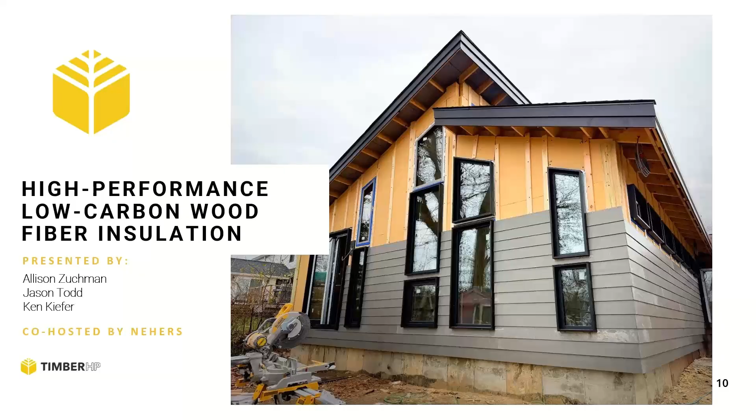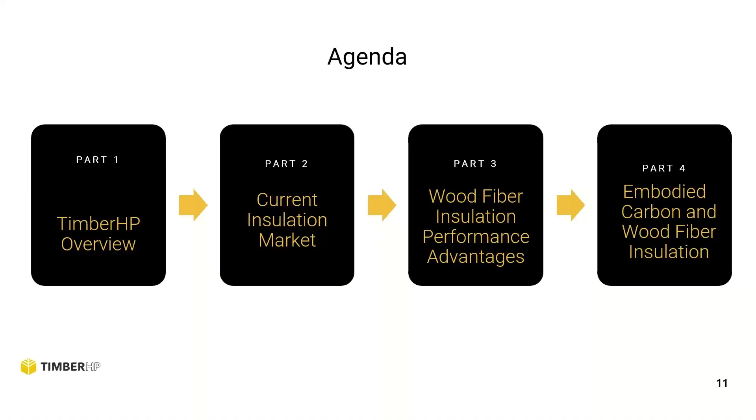All right. We have a lot to cover, and I'm really excited about this presentation. So let's turn it over to our presenters. Please take it away, TimberHP. All right. Thank you so much. So yeah, let's talk a little bit about the wonderful world of wood fiber insulation. If we can go on to slide 11. So we'll start by giving you an overview of what TimberHP is, if you don't already know us. We'll move on and talk about what our current insulation market looks like. Then we'll hit the wood fiber insulation performance advantages, and then move on to embodied carbon and wood fiber insulation, how they pair really well together. Next slide, please. All right, time for some poll questions.

All right, so the first poll question should be appearing on your screen, and I'm going to read this out in case there are folks attending on the phone who can't see the screen. So the first poll question is, who's on the call today? Are you a HERS rater, an architect, a builder, an owner, developer, or a consultant or engineer? So please take a moment and log in your answer, and we can go ahead and close that poll and show the results, please. Great, so HERS rater came in at 25%, architect was 0, builder is 11, owner developer is 13, and consultant engineer is 50%. Allison, do you have any comments on this before we jump into the next poll? No, it's great to see a good mix. I think we're just curious to know who's on the call so we can speak more to each of you. We figured there'd be HERS raters and consultants based on who's involved in this organization, certainly. Yeah, you guessed right. Great.

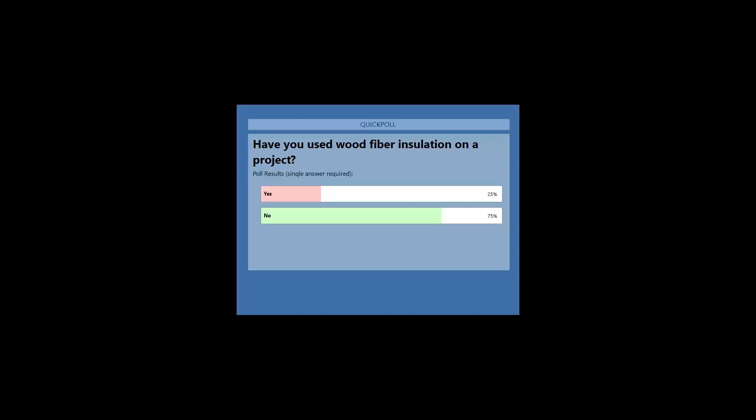All right, let's have the next poll, please. So the second poll is, have you used wood fiber insulation in your project? You have two choices, yes or no. So please take a moment and log in your answer. And we will leave this up here for a minute so you have a second to put it in. I'm very curious to see what the answers will be here. So go ahead and take it down. Great. So the answers were yes, 25%, and no, 75%. Allison, any comments on this one? Well, I think it probably makes sense, since we are the first manufacturer of wood fiber insulation in North America, that only 25% have used the product, because we haven't been around that long. But we're glad to make that number a little higher after today, hopefully. Fantastic. All right, great. Let's see the third poll.

All right. The third poll is, when considering insulation, what is the most important quality to you? Performance, thermal and acoustic, durability, moisture and pest resistance, cost, environmental impact, or ease of installation. So please go ahead and log in your answers for this one. We're going to leave this up also for a few seconds here so folks have a chance to click their answer, even if they're in the middle of working on an email or something. We still want to know what you think.

So, yep, the answers are coming in. This is great. This will be very interesting. So we'll just leave it there for a couple more seconds. Performance, durability, cost, environmental impact, or ease of installation are your choices. All right, let's go ahead and see the answers.

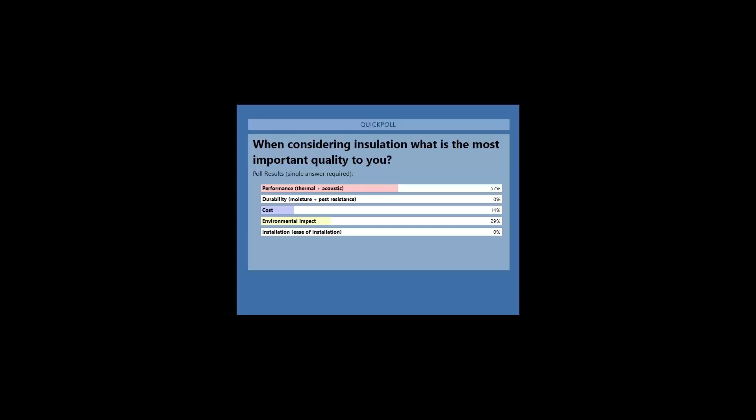All right, so performance came in at 57%. Durability came in at 0. Cost came in at 14. Environmental impact came in at 29. And ease of installation came in at 0. Allison, any comments on this?

Well, we always get a variety of answers to this question. I think performance, environmental impact, and cost are always, in any audience, the top considerations. But we are seeing environmental impact, carbon reduction, also just the fact that we're using reclaimed material from the timber industry in Maine, all of those things. We're glad to see that people value environmental impact, because we feel like we are outstanding in that category compared to other insulation products.

Great. All right, so I'm going to turn this back over to you to jump into the presentation. So please take it away.

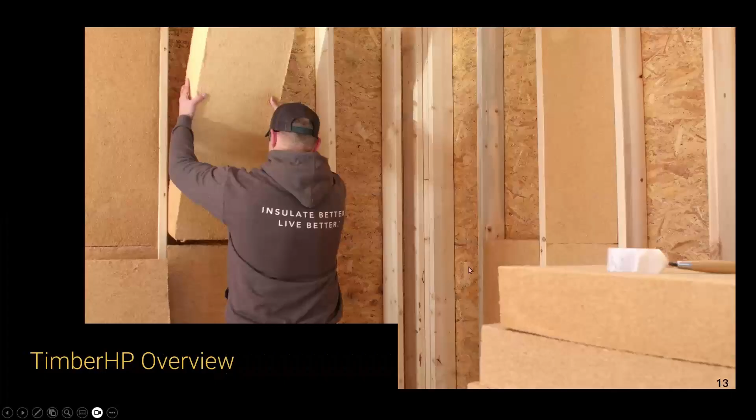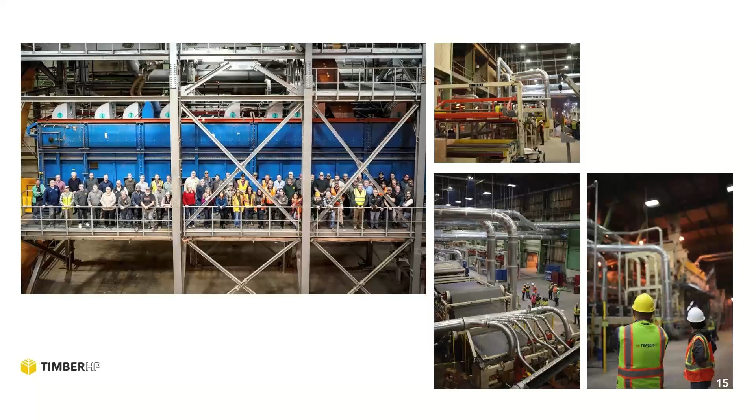And here you can see some shots of our team there on the left. And also, this is where all the magic happens. This is a picture of our batt insulation line, operational, and making some of the best insulation in the United States. On to 16.

And this is important for us because we in Maine have been devastated by the loss of paper mills. There once were 16 to 18 paper mills. We're now down to 2. So we have lost a market for over 4 million tons of low-grade residual wood that the paper mill industry used to use.

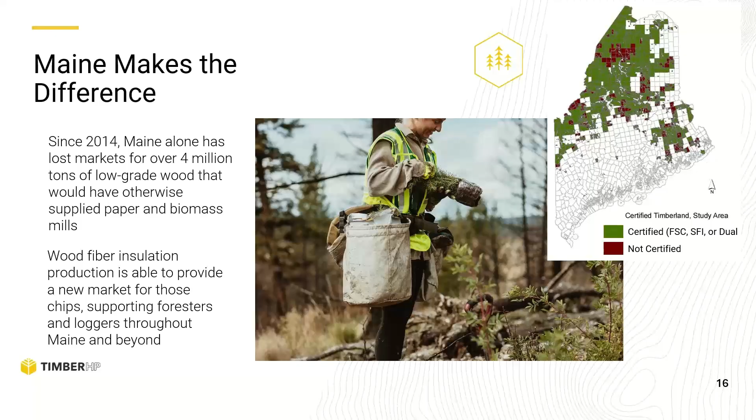We're able to source all of our raw materials from different lumber mills and forestry companies from within 100 miles of our mill. And you can see just how much of northern Maine has certified or not certified timberland, but mostly certified timberland, where we can have access to an almost unlimited supply of raw material. I don't think, even at full capacity, we'll ever touch more than half of what's available in the market. So we've been able to really help revitalize the whole industry, not just putting the few people back to work that work for us. On to the next one.

Now in Europe, this is a very proven and existing technology. They've been using wood fiber insulation for decades there. They have 20 to 25 plants. There's more in development. It's well over a $1 billion market. But in Europe, because of the benefits of wood fiber insulation, they're willing to pay the 20% premium that they experience over other types of insulation.

That's not the same here. We have more trees than people in Maine. They have more people than trees in Europe. So the raw materials are much more expensive in Europe. So we won't see that same cost premium, which puts us at a real competitive advantage. We can move on now.

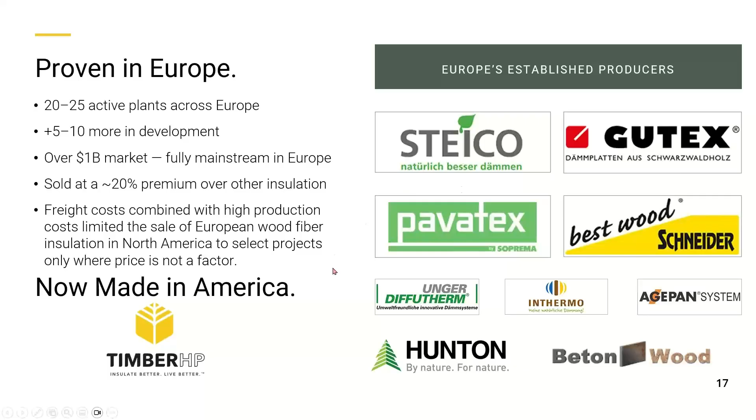So we want to bookend the country. We want to grow and really store the carbon for the trees long term and really help out our country from an embodied carbon standpoint and from an economic standpoint.

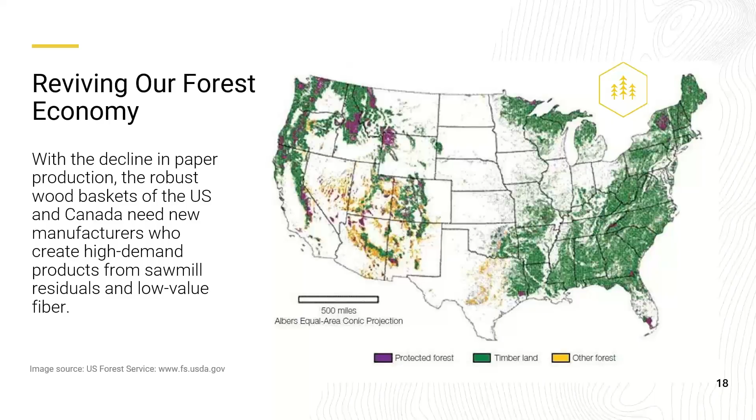Yes, absolutely. And it's important from an economic standpoint, because forestry is an expensive undertaking, and is a dangerous undertaking, and while losing economic drivers to offset some of those costs and danger, the forestry industry at large faces hardship without a market for their residual materials. So it's very important for sure. On to 19.

So this is a very quick and simple diagram of how wood fiber insulation is made. We cut down trees to make square or rectangular boards to build our homes, and we know we need a lot more homes where we have a housing shortage. So we're going to keep harvesting trees in a sustainable way by replanting them, but when we cut a round log into rectilinear shapes, we get waste. We take that waste, those wood chips from the lumber mills, and we run them through our refining process. That refining process, though it looks complex when you see the images of the manufacturing equipment, is relatively simple. We steam the wood, we get it to a certain moisture content, we grind down the wood chips into a very specific fiber size that we need.

We have very highly engineered plates that grind these wood chips into the fibers that we need. Once we get them into the fiber, we can then spray them with a liquid solution of borate salts for our fill and batt product. Those borate salts are a natural fire retardant and pest repellent. They do a really wonderful job at mitigating both of those problems.

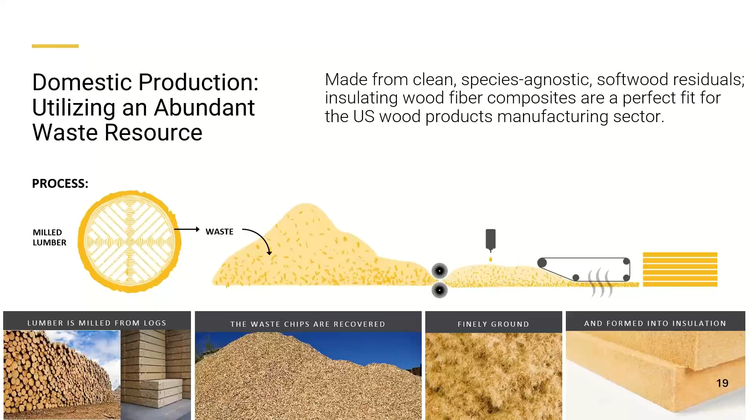There is a ton more science that Jason knows really well about wood species types, fiber size, glue mix, paraffin mix, and all those good things. So if you ever want the in-depth story on how wood fiber insulation is made, please feel free to reach out. We're happy to explore that with you. On to slide 20. And as I mentioned, these are the three products that we make. We have our TimberFill, our TimberBatt, and our TimberBoard. On to 21.

Now, I mentioned earlier that Europeans pay a 20% premium for their wood fiber insulation. Because of the abundant availability of raw materials, we get those raw materials very inexpensively. So that allows us to be very cost competitive. So for any other borate treated cellulose insulation type, we're going to be comparable in cost. For board insulation, we're going to be roughly the same cost as foam. Foam is priced based on the petroleum market, so right now they're facing some price pressures.

Mineral wool, we aim to be around 20% less than mineral wool materials for our wood fiber board. Our batt is going to live right in between your low-grade fiberglasses and your mineral wools. We should be priced probably around the same as high-density fiberglasses, but yes, we're going to live right there in the middle of the insulation cost world for our batt product.

The board pricing is comparable by R-value too. I think it's worth qualifying. The foam board square foot price is what we're competing at, at that equivalent R-value. So we're at 1.5 inches versus 1 inch, and we'll most likely never compete with conventional fiberglass. Certainly a higher density acoustic gets a little bit tighter.

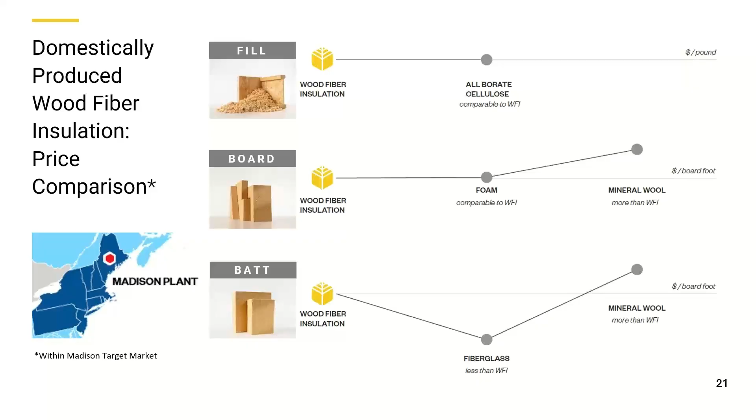But I think what's really important with the batt product and why it is a premium over that commodity product is just how well it can install and getting a grade 1 install simply because of the firmness of the material. Yes, Jason, I like your analogy the last time we discussed. It's a grade 1 install every time. That's right. All right, on to 22.

So this is us. We're a carbon storing insulation product. We're scalable. There are other carbon storing insulation products available, but they're not as easy to scale at mass. Cost effective, we just talked about that. Carbon negative, for sure. We're turning trees into something. We're not letting them rot or burn. High performance. It's a very dense insulation type, so it will help manage airflow through the assembly.

Wood is great at managing moisture. It's what it does to stay alive. So from a cellular structure, it does great at capillary movement of moisture through itself. And then its vapor permeability allows it to dry quickly. Conductivity, we'll talk a little bit about the thermal mass that is uniquely a part of wood fiber insulation. And then sound attenuation, wood fiber insulation, because of its density, is among the best sound attenuation insulation materials available.

This is, again, made from wood residuals. So it's very nice to work with. When you cut it, you don't get little foam dust that static clings to everything and blows all over the place. You get sawdust. It's non-toxic and safe. It leads to a really, really high indoor air quality. We don't see any off-gassing of harmful chemicals like you would with other insulation types.

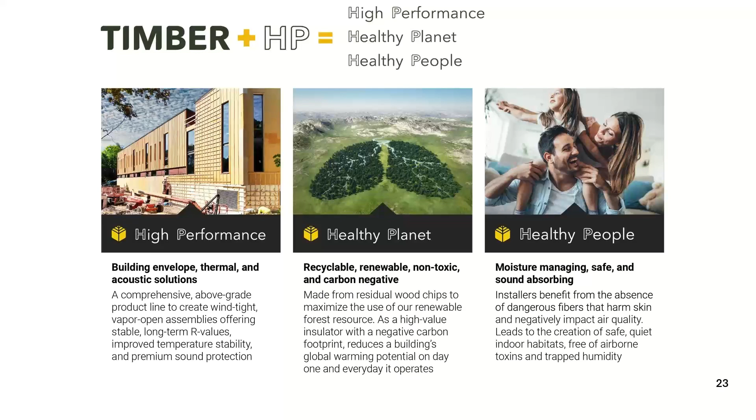Absolutely, absolutely. And to slide 24. So here's what our current insulation market is going to look like. Next slide. We know that every year or every 3 years through the code cycle we're requiring more insulation to the exterior of the building. We're requiring higher air tightness, all driven toward making buildings more efficient and more durable and resilient.

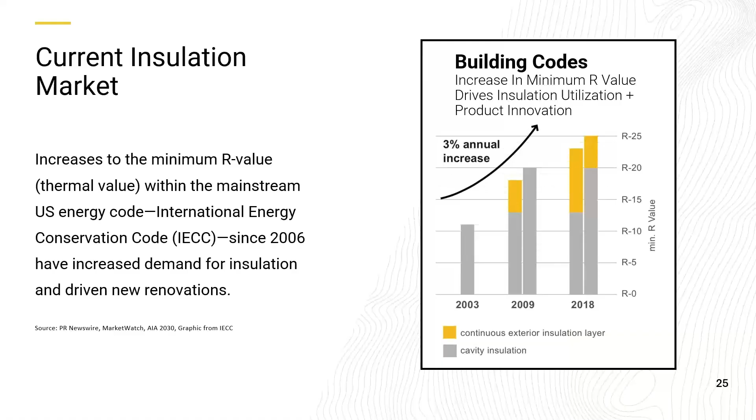Next slide, please. And to do that, historically, fiberglass has been the answer. It's very inexpensive. It still occupies the largest share of the insulation market at over 55%. And of course, as R-values have been driven up by code, a lot of people have turned to foam plastics as an easy way to try and get there. As Jason said, they have places in insulating, but they do have their own drawbacks.

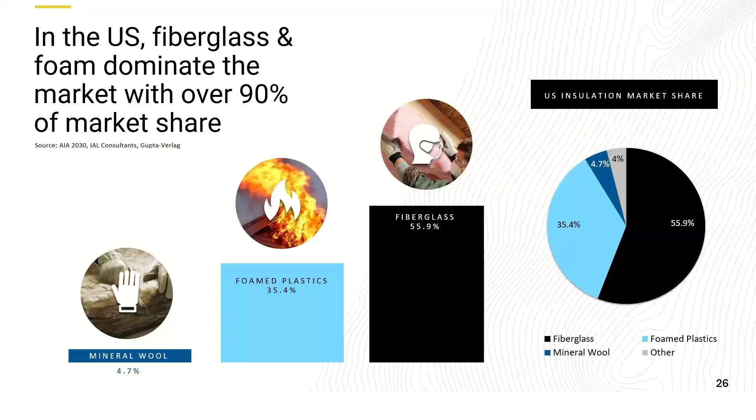Mineral wool nationally is around 4%. I think in the Northeast we'll see that higher, closer to 10 to 12%, as an alternative to your fiberglass and foam plastics. The rest of the 4%, that's where we fit in with denim products, sheep's wool, all the other bio-based products, cellulose, and things like that. So we can see that we have plenty of room to make hay in the insulation market. Next slide.

So as codes have increased in stringency, and building science has provided a lot more data on how we should be building buildings, we can see that we haven't had much change in the insulation industry. Fiberglass has been around since 1938. Most of them are formaldehyde free now, but they're not very dense. They face easy compressibility for reduced R value. It's easy to not get tight installs and can allow for wind washing in the cavity.

We got foam plastics in the 1950s. Foam plastics are definitely flammable and can often have toxic off-gassing. I have a friend who's a firefighter in Massachusetts, and this is something they're concerned with when they enter a burning building. Those foam drips can actually burn through different parts of their fire protection equipment. So that is concerning for them, not only for that, but for the toxicity of the smoke as it's burning. Mineral wool came around in 1953.

Obviously, you can't burn a rock, so it is extremely flame retardant. But it's also very itchy. It can be a very big irritant on your skin, and also in your lungs and in your eyes. And then we have cellulose in the 50s as well. Cellulose is definitely falling victim to a shrinking feedstock, as we don't use newspapers so much anymore. We're getting all our information digitally. So we see that the feedstock is shrinking. The powdered flame retardant, as I said earlier, likes to blow off as you're blowing the insulation in, and it's a very messy, dusty install.

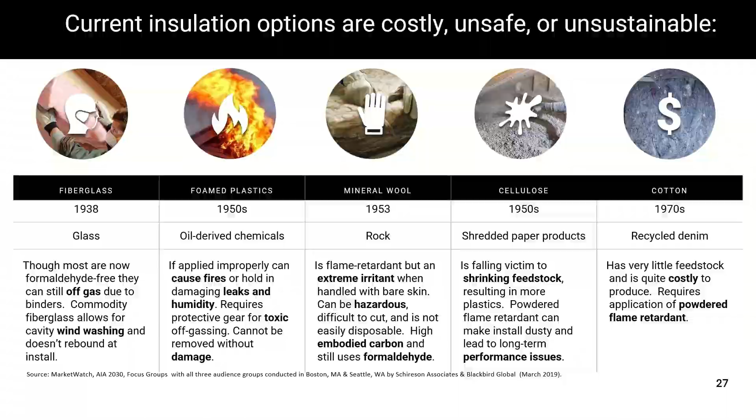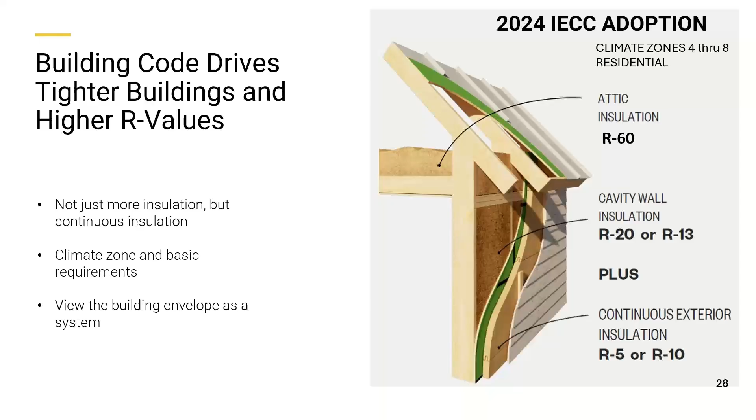So as we mentioned earlier, our above grade system allows us to hit all of the energy codes that are already here and that are coming down the pipe. Next slide, please. And one of the best ways we can do this is through the reduction of thermal bridging with the use of the continuous insulation. This is why this has been getting added to the codes, as you all know. This is the best way to maintain your wall's effective R value.

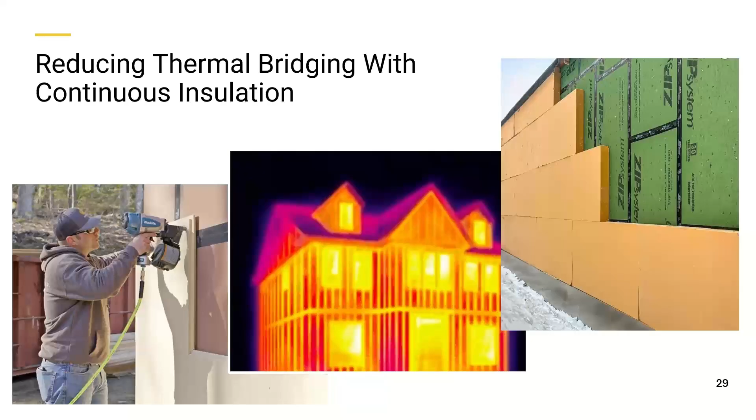I see it all the time. I live in New Hampshire. New Hampshire seems to be the black hole for building performance. So I can go down my street any given day on a frosty or dewy morning and see where every home's studs are, just based on the melt pattern of that frost. Next slide.

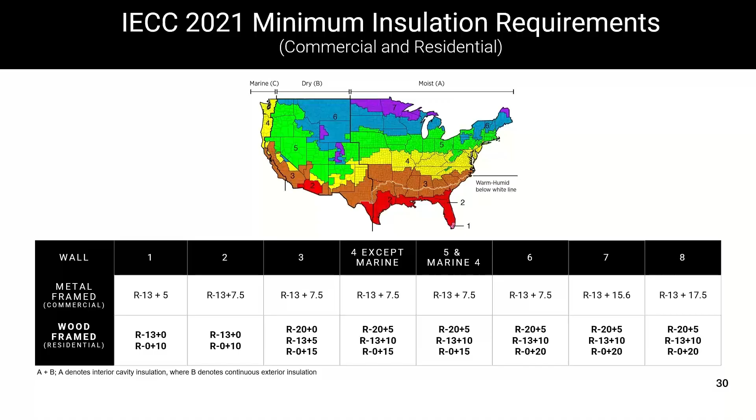So this is just a quick slide based on our climate zones and what is required for wood and metal framed commercial and residential construction types for interior and exterior insulation. Next slide. So for us, we look at ourselves as a relatively drop-in replacement for most above grade materials. So we're going to see the easiest replacement, especially in the batt, because this is going to install exactly the way your mineral wool batts are going to install. You're going to get a grade 1 installation every time. You're not going to be able to just grab handfuls of it like you will with fiberglass, for sure.

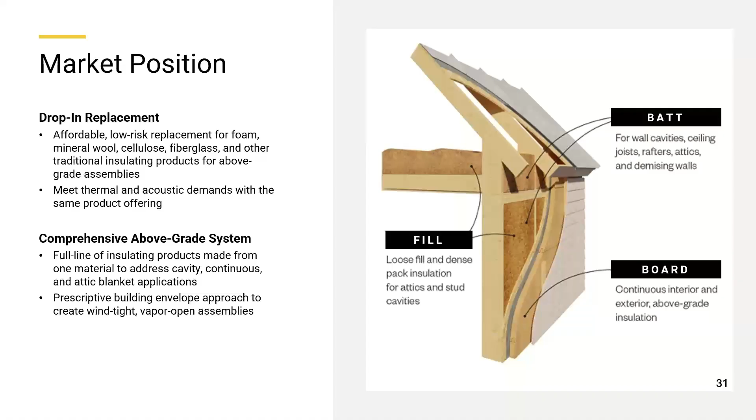But the installation quality will be much higher. Attic blankets are going to install relatively the same as your cellulose. The machine just needs to be adjusted properly, and we do have guidance on how to adjust the machine properly to blow a denser fiber. And then our board insulation, any contractor who's ever cut a piece of sheathing should be able to use our board insulation very easily. Cuts just like wood with all the same tools that they have, and it compresses very, very little. So the final cladding is going to have a higher quality install because of that. Next slide, please.

So for our exterior board insulation, right now with our Class B rating, we're going to be able to be used in single and multifamily construction types, type 5B most specifically. So buildings 4 stories or less, some mass timber, CLT, and then of course this is a great addition to factory-built solutions for either panel or modular buildings, and of course passive house and net zero carbon negative buildings were the perfect fit for all of those as well.

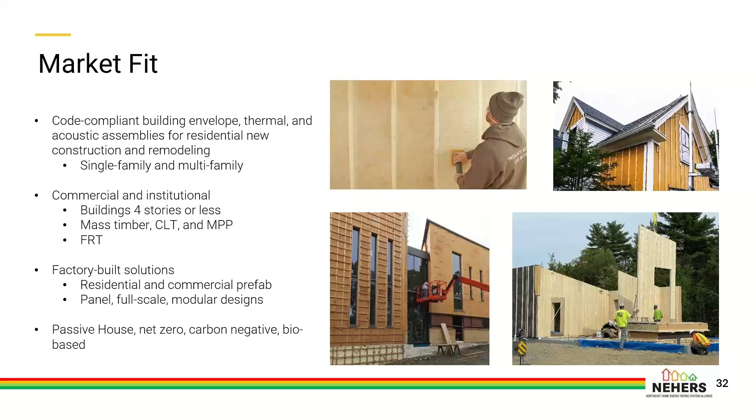Yeah, you're seeing some outside of the traditional residential type 5 construction, but for the cavity insulations in particular, it's something that's available for any construction type. We've got hourly rated walls and acoustic STC ratings on walls as well for those cavity insulations. So it's something to consider when projects go beyond the residential scope. Absolutely. All right, now we can go to number 33.

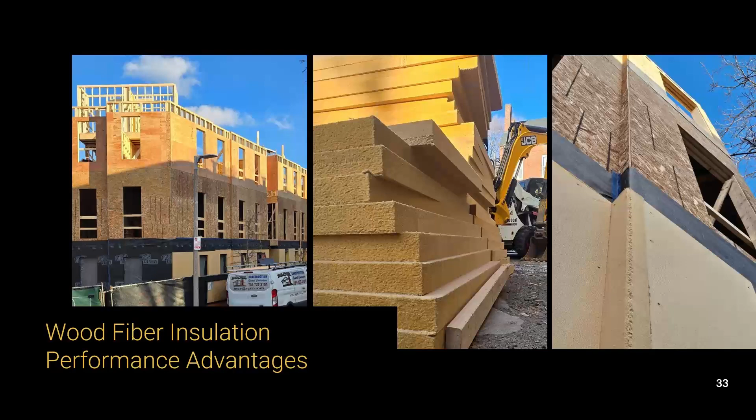So wood fiber insulation performance advantages. This is actually for any of you who are near South Boston. This is in Roxbury at 27 Kenilworth Street, if you want to go see it. Next slide, please. So our loose fill and dense pack insulation is going to get an average of R 3.8 per inch. Jason, that's a little bit lower for the loose fill, correct?

3.7 maybe? Yeah, when we get dense packed, we'll hit that 3.8 per inch, but it does drop depending on, like, if it's in an attic. There's sort of a progressive density, so it's all in a number of inches to hit an R value. So 3.4, 3.5, 3.6, depending on how compressed it gets. It gets better to a point. We get up towards the batt density.

That's sort of where we tap out or maximize our R value per inch. Perfect. And as Jason said, this is treated with our borate salt. So this is Class A and can be used in nearly any construction type.

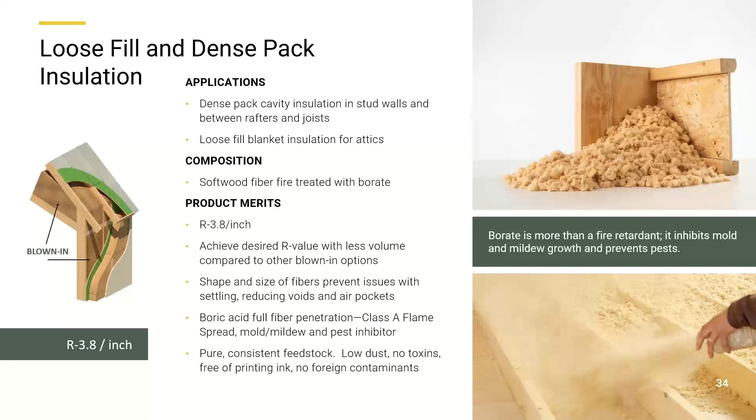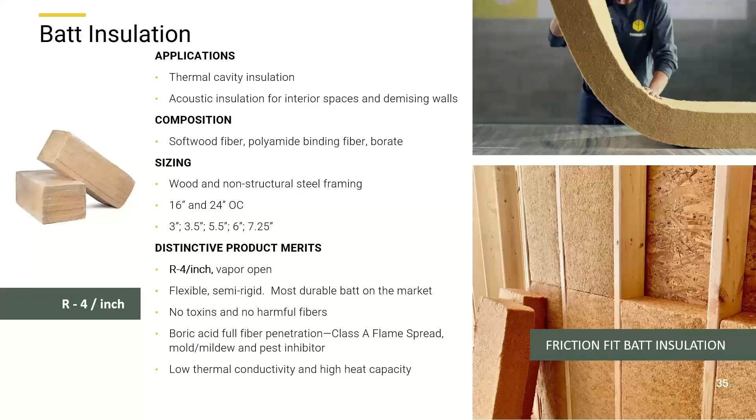Yeah, that's a big and important point. It's a twofold process for that flame resistance. If we look to what happened at the Cathedral of Notre Dame, the biggest reason that there wasn't more catastrophic damage than there was is because the char protected the wood.

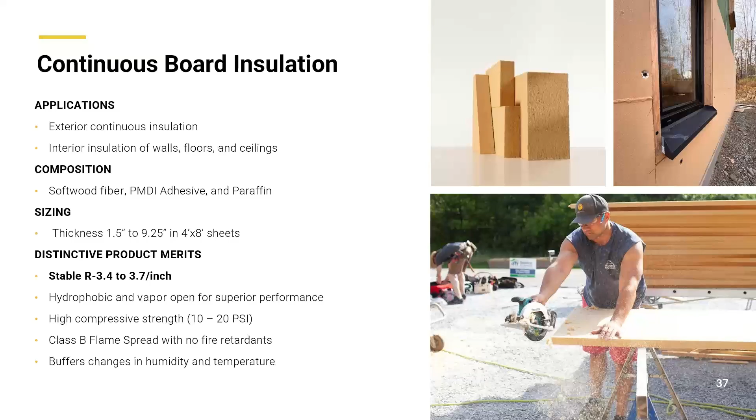but we can run this all day long and it's never going to make its way through the bulk of the board. It's hydrophobic, particularly at the surface, but it's also a bit of a complex puzzle because we're treating it at the fiber level. It remains vapor open and it allows moisture to move around as needed. It acts as a big buffer to the structural sheathing and the structure itself, which is the critical part that needs to stay dry and be allowed to dry in the end.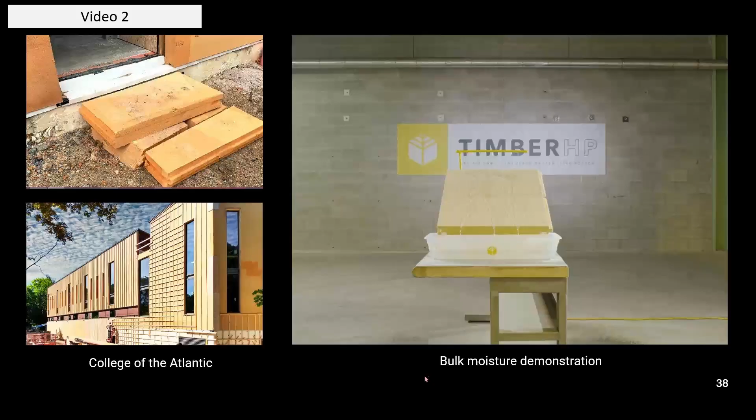Beautiful. All right, on to the next one. And here is a video demonstration of our non-borate treated wood fiber continuous insulation compared to our foam counterparts. Just keep in mind during the video that it is a non-treated board, so there's no...

Yeah, I find this really compelling in the speed at which EPS, which is not going to be as common on sidewalls necessarily, but it's still a liability. And you're seeing even with an XPS foam, even some that are treated, at least at the surface level, to be Class A, to be part of those taller assemblies, it melts in the end. And there's quite a bit of smoke that comes off of this.

The important thing with fire resistance in building materials is allowing people to have the time to get out of the building, not being consumed by the other toxins that might come off of that. And again, like Ken had suggested, Class B board, limited flame spread, limited smoke. The brave Edith grabbing the panel while it's still on fire there. But really surface charring, protection, added time without added chemicals, just the density of the board and that charring.

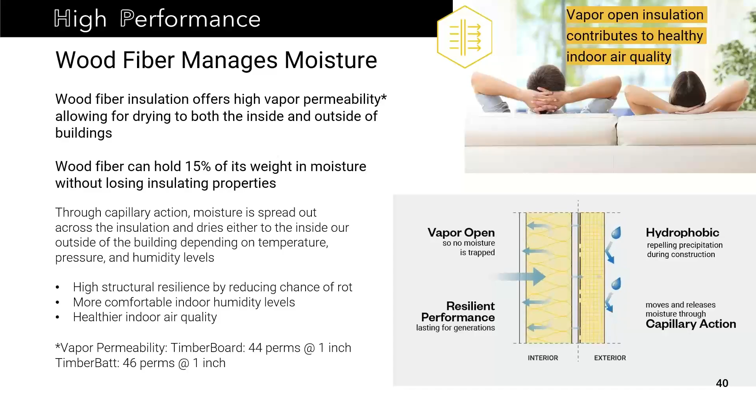Yeah, I mean, the big important thing here to understand is that the wood can get wet. It's not the wetting process that harms the wood, it's the staying wet. So the ability for our products to dry and dry rapidly really increases the resiliency and durability. Next slide, please.

Yeah, it's absolutely true. There's a balance of density and heat capacity and also conductivity. And when we do steady state, hot plate, cold plate, what's the R value in that? Every material has to reach that steady state to do R value testing. Foams tend to be light density and tend to pass that heat through pretty quickly, even if they are higher R value. We recently got the pleasure of sending some 9.25 inch board down to a lab for third-party testing, and we got to be the talk of the lab because it took 8 days to reach steady state.

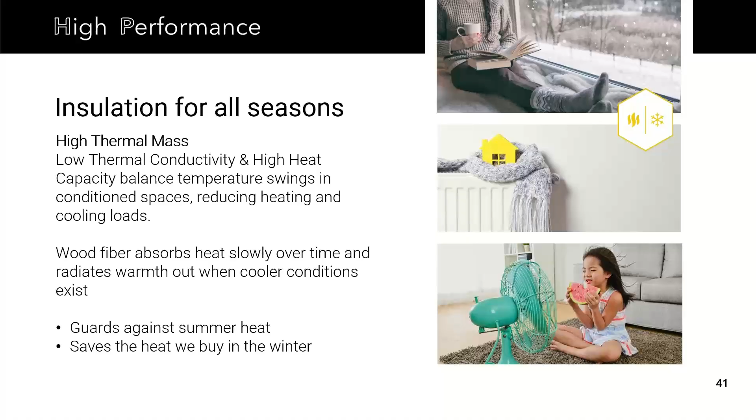But yes, we are very vapor open. We're not going to trap humidity within the home that will lead to mold and mildew and all the respiratory problems that we're seeing become so prevalent lately. And acoustics, the acoustics are amazing with wood fiber insulation.

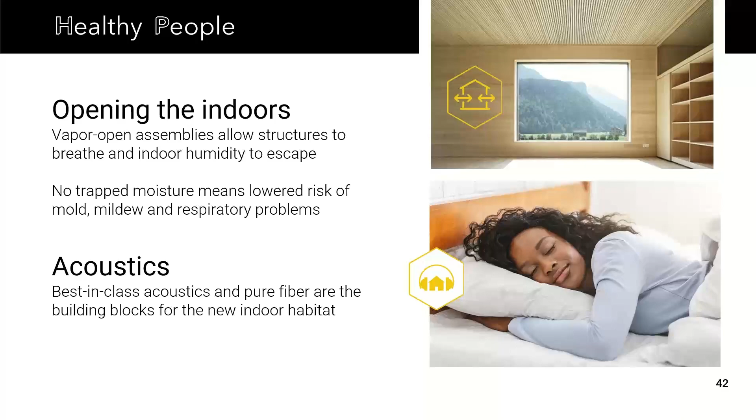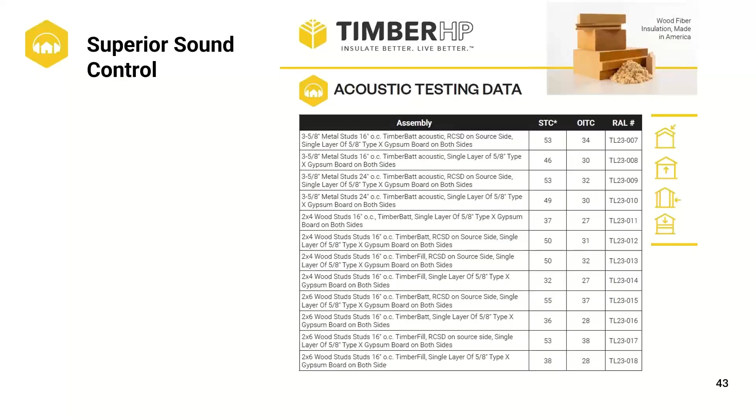Next slide, please. And this is an example of some of the acoustic testing data that you'll be able to find on our website. And you can see that in many cases, with very simple assemblies, we can reach the STC rating required for demising walls in multifamily buildings.

Next slide, please. Here is one example of how we can perform better than mineral wool in this very specific assembly. So this is just 2x6 studs, 16 on center, cavity filled with TimberBatt, resilient channel on just the source side, and one single layer of 5/8 Type X gypsum on both sides. So we can see that we don't have to add double layers of gypsum. We don't have to add 2 resilient channels. It's a very simple wall assembly, and we're going to outperform others in the same scenario.

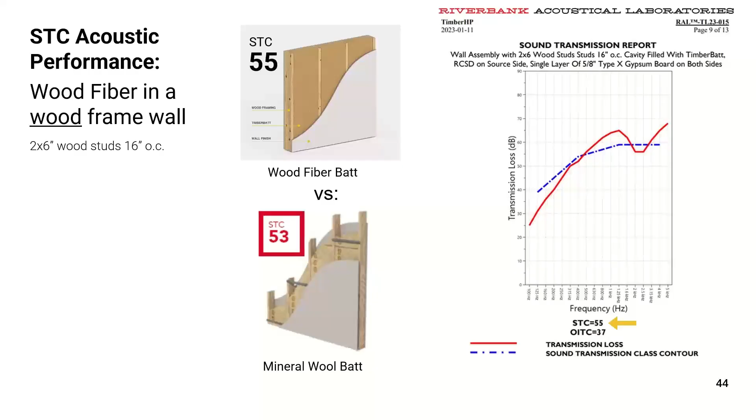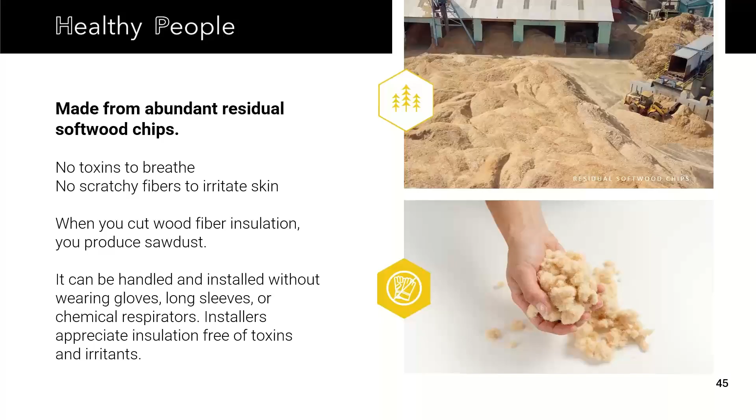Next slide, please. And healthy people, I know we've talked about this a few times, but it's wood. It's wood, it's all natural products. It is a pleasure to work with. If you've ever had a chance to get your hands on it, you can touch it with your bare hands and not be itching for days afterwards. There's no concern for any of the skin irritation unless you're allergic to trees, the wood pulp from the trees. Very few people are, but this is a really, really great insulation choice for everyone, especially those with respiratory problems.

You'll know more about that than I will. Yeah, it gets a little complicated, but in the non-combustible types, there's a place for us for thermal, fire resistive assemblies. If they're hourly rated, we have those, and certainly for acoustic applications. It gets more complex when you start talking about outside of the walls, and certainly with our board product, we're focused on type 5 construction. Just about all of that available with TimberBoard currently. Perfect.

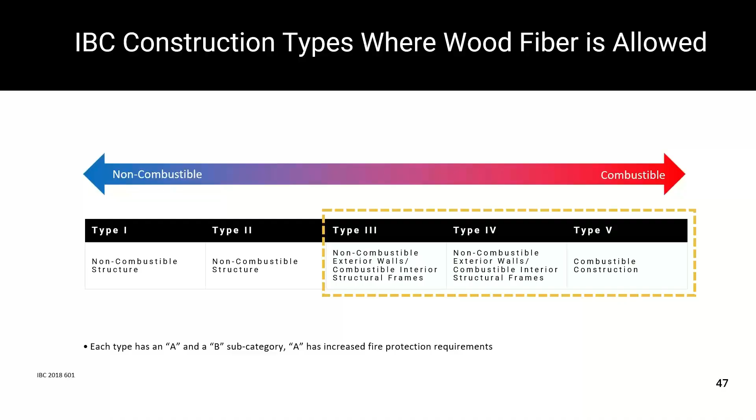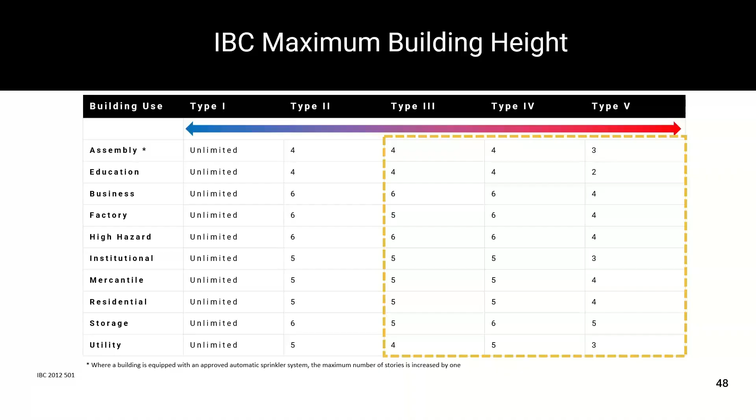Next slide. And there you see just a highlight of where we stand. And the next slide will show you a little bit more in depth of what our limitations are on building height. Next slide, please. And so there you see kind of where we know we can play for sure without much complexity with the interior products. Again, the exterior product, we want to stay in that type 5 zone. Next slide.

Now, low embodied carbon. This is one of wood fiber's most impressive features, is just how much carbon storing can happen within this type of insulation. Next slide, please. So we know that the CO2 emissions by sector is largely consumed by buildings. 30.8 or 30-ish% of that is the operational energy, heating, cooling, lights, all the good stuff that we need to exist inside our buildings. And 8.2% of that is from the impact of materials and construction.

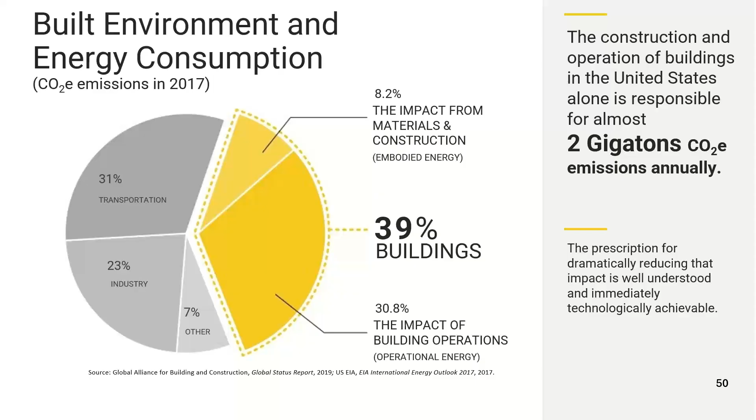And this is a big reason why our founders went through everything they went through to get this company up and running, because we understood that, hey, we can do a really great job of saving energy, but if we're doing it with high embodied carbon materials, we're only taking it out of one bucket and putting it in the other. So if we go to the next slide, we'll kind of see how that looks. This is how we do our LCAs. You're all familiar with that. We figure the extraction and transportation of raw materials, manufacture, use of product, and end-of-life treatment.

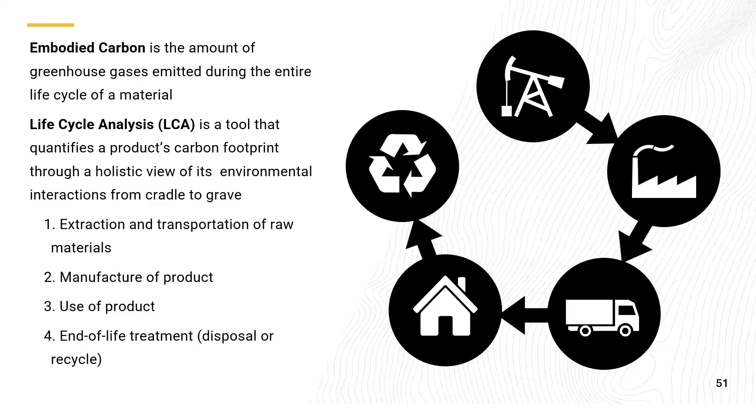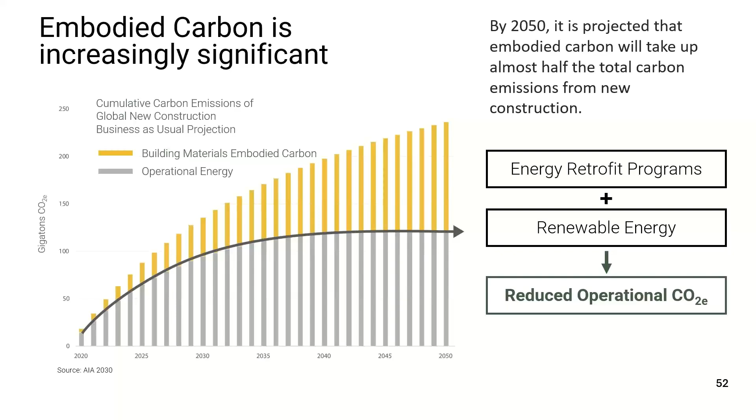And next slide. And that gets us to this, where we're doing a really wonderful job at mitigating through code and the requirement for more energy efficient buildings, mitigating the operational energy of buildings. But we're doing so with much higher embodied carbon materials. Like I said earlier, when building codes ask for more R value, many people look for the path of least resistance, and the highest R value per inch are high embodied carbon foams. So we're trading natural materials in for plastics and petrochemical based materials, which have a high embodied carbon, and that's not sustainable for us in the long term. Next slide.

And so you can see this here, concrete is among the worst offenders in the building industry as a high embodied carbon material. We can see roughly 14 to 33% reduction. There's always going to be a large amount of embodied carbon in the manufacture and transportation of concrete. Insulation is really where we can shine. I mean, with the advent of wood fiber and bio-based insulation materials, we can get rid of all of the embodied carbon within the building insulation at no cost premium, and that's a big important factor right there.

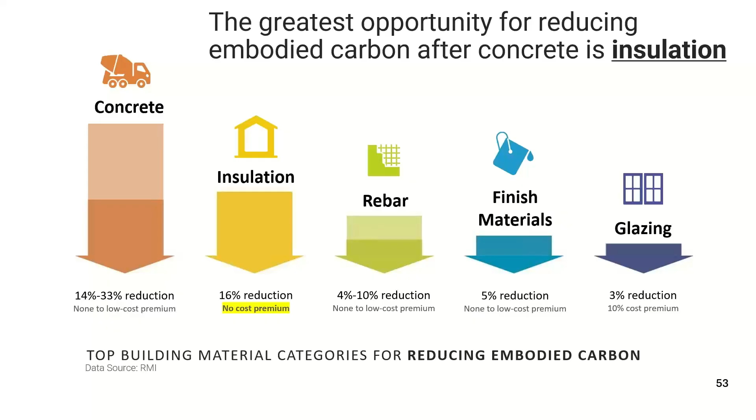There's a lot of pushback from builders and the market saying, hey, these buildings are getting too expensive to build. All these initiatives are creating difficulties. The insulation is going to be no cost premium, and we're going to be able to reduce the embodied carbon of the insulation to a negative number. Next slide, please. And I'm just going to reinforce this here. TimberHP is carbon storing. It's wood. We're taking a tree and turning it into something useful. Next slide, please.

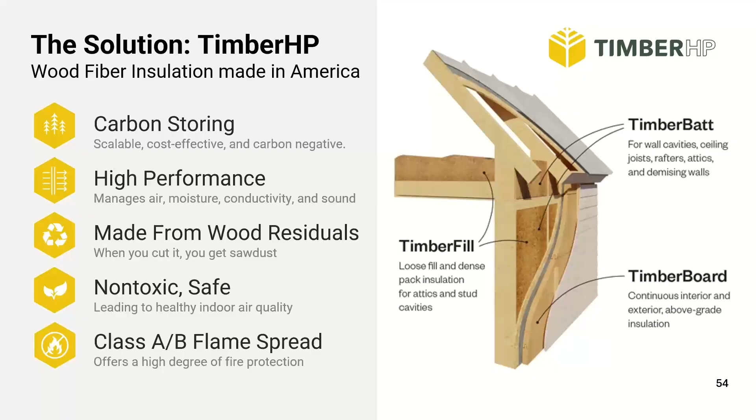And that's what we're showing here. That's what trees do. They bring in CO2. They extract the C from the O2, let the O2 back out in the air to give us nice, fresh, clean air to breathe, and they hold the C. And the only time we're going to see that released back out into the world is at the end of the tree's life.

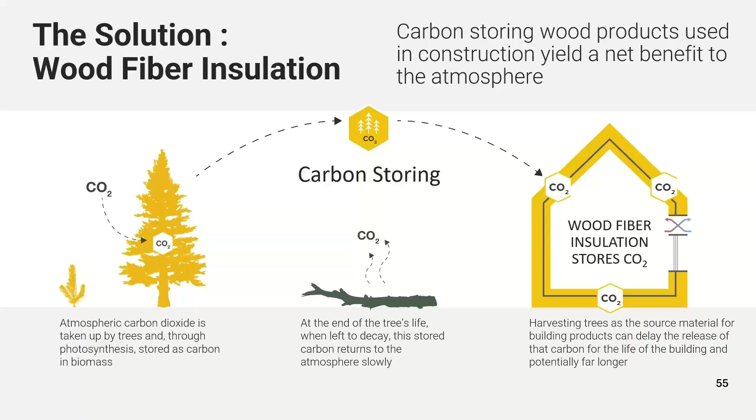That happens slowly, but we can stop it from happening by turning them into something durable, something high performance, and something useful. Next slide, please. And this is available on our website. We've got the environmental product declaration with our LCA for our batt. I believe our fill is coming very soon. That's right. Yeah, we're right around the corner. Actually, we're just wrapping that up and putting the final touches on it.

And for those that are looking for life cycle assessment or EPDs for the timber board, which I think is the most compelling of all of the products, we're going to stand up what they call a pre-EPD. It'll be third-party verified, but it's a limited data set.

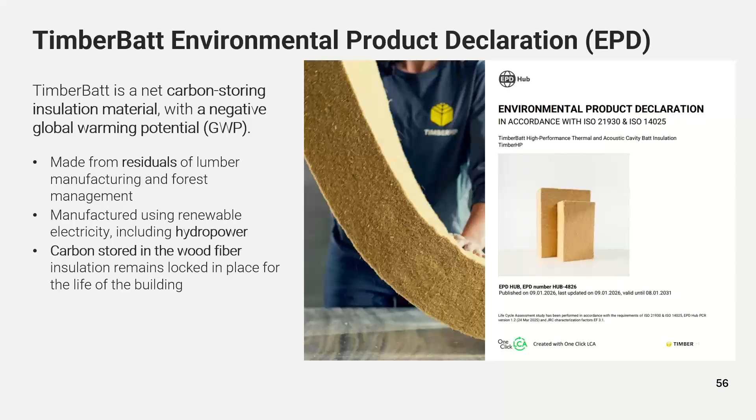We have enough information. You need a year's worth of data for the life cycle assessment. And we've gotten across that line for our cavity insulations, but we're just getting started on the board side. So while we have some good reference numbers from European materials, we're just starting to get into our own now, which is really exciting stuff. Absolutely. Next slide, please.

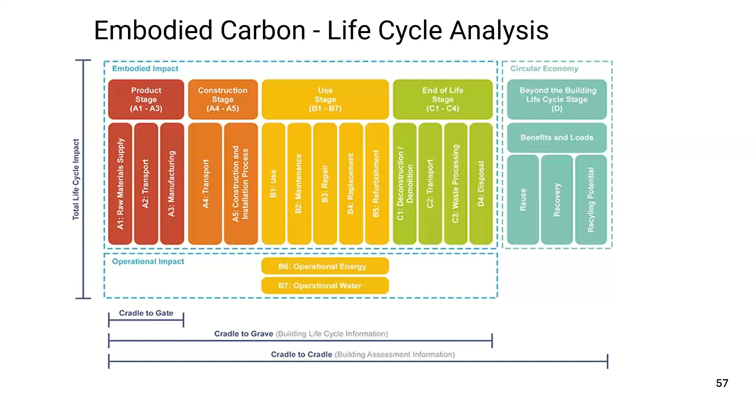So our EPDs are cradle to grave. And of course, the A1 through 3 is going to be the biggest portion of the carbon storing story for us for wood fiber insulation. Next slide, please. And this is where we really see this put into hard numbers. So with wood fiber insulation, we save about 20 pounds of CO2 per 100 square feet at R1. So we can see that this is going to be exponentially higher as we get into real building size numbers. Our buildings are usually more than 100 square feet, and we use more than R1 of insulation.

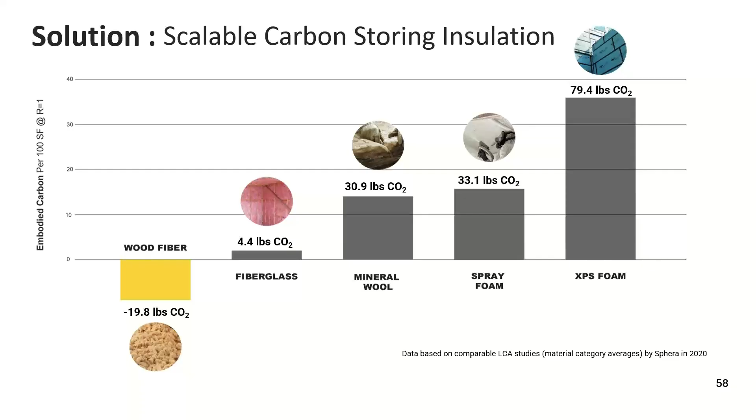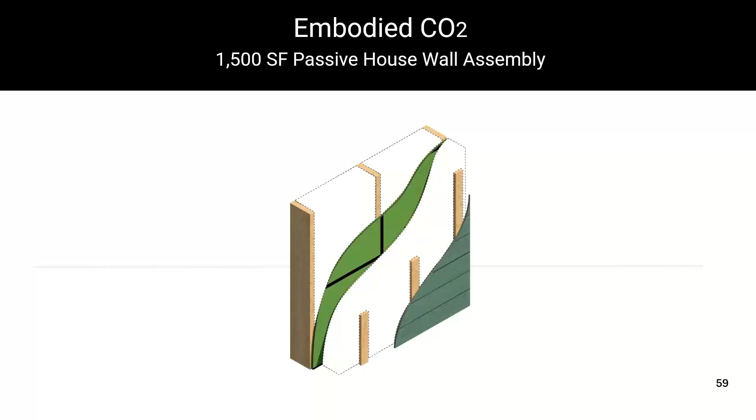So the next slides are going to give you a great overview of what that looks like in practice from an actual wall assembly. So here we have the embodied CO2 of a 1,500 square foot passive house wall assembly. This is going to be a 5.5-inch stud bay with 5.5 inches of insulation to the exterior of the building. Advance, please.

So on the 2x6 batts, we're going to see wood fiber over 0 is going to save 3,100 pounds of CO2. But the delta between us and a mineral wool insulation is going to be about 5,600 pounds of CO2. It is very energy intensive to turn rocks into fibers. It takes a lot of heat to melt them. So the delta between the two is going to be quite substantial.

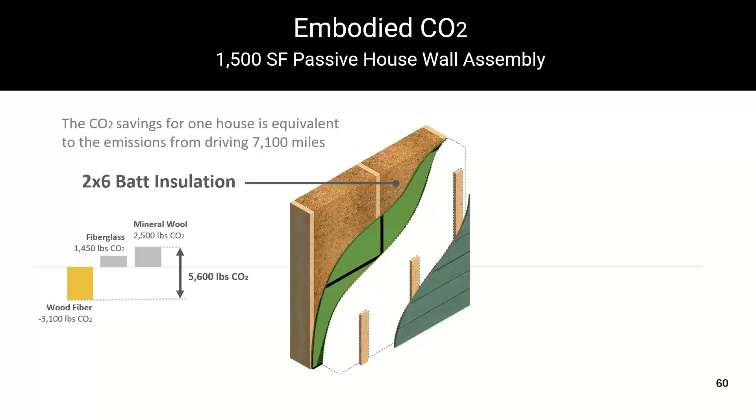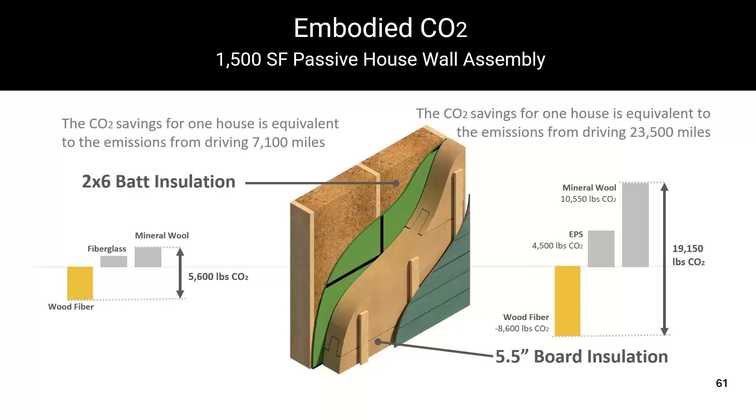And then as we get into the exterior of the assembly with the timber board, even though it's still 5.5 inches, that number is going to be quite a bit higher as far as CO2 saved and stored because it's a denser product. So there's more wood fiber in the board insulation. Same with the mineral wool. The mineral wool on the exterior is going to be denser. So you're going to see a lot more material needed for those insulation types. And we're going to have a total savings over mineral wool of a little over 19,000 pounds.

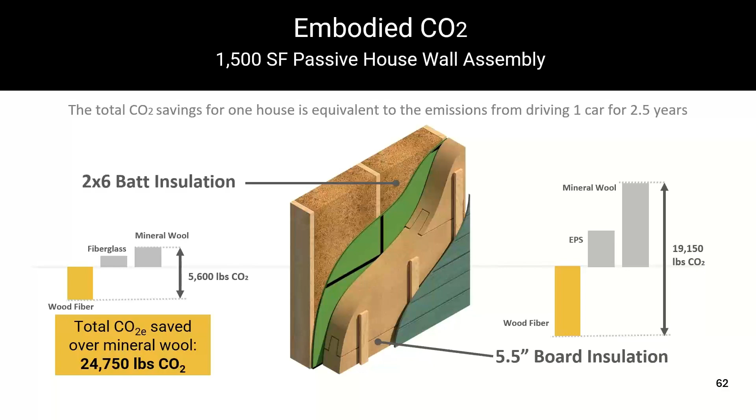And that means our wall for a 1,500 square foot passive house wall assembly compared to mineral wool is going to be nearly 25,000 pounds of stored CO2, which is roughly the equivalent of driving a car for 2.5 years. And this is going to be at a cost savings when compared to mineral wool insulation. Next slide, please.

And you all are very well aware of all of the research and all of the talk that's happening in the industry about understanding embodied carbon, understanding the implications of what happens if we don't concern ourselves with embodied carbon. There's just so much available data, so much available research on how important this is to start tackling.

Massachusetts is doing a great job at pushing forward these goals and these incentives. I mean, the stretch code gives a bonus 3 points for a net zero insulation, which is very easy to achieve with our materials. Next slide, please.

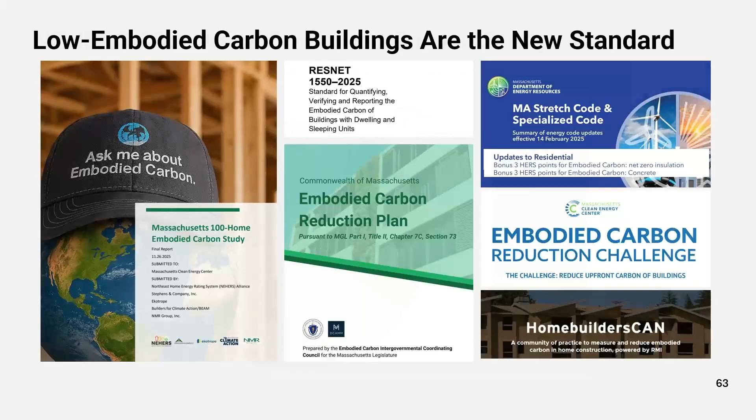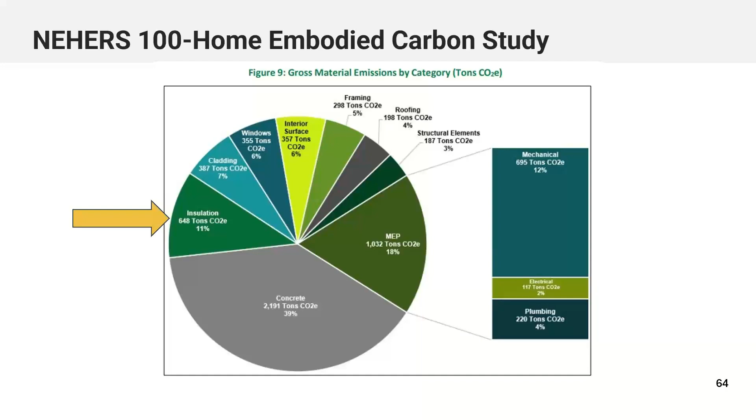And this is what we're seeing. I mean, the proof's in all of the data, all of the studies. Insulation is one of the highest embodied carbon materials in buildings, especially with the prevalence of foam to try and hit ever increasing insulation R values. And with this we can save 648 tons or more by switching to wood fiber insulation. Next slide, please.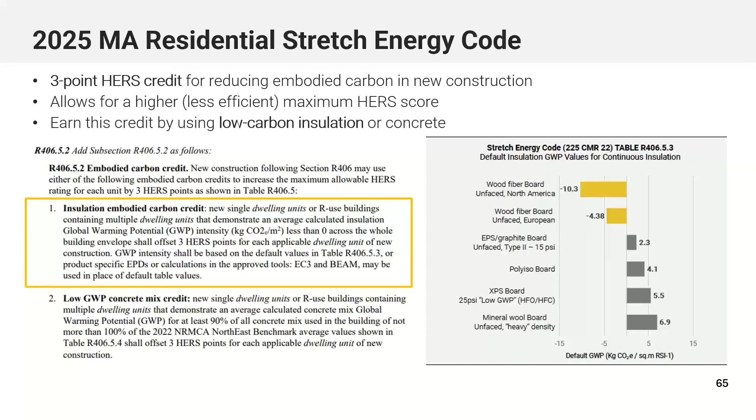That's the one thing that I try really, really hard to make sure that contractors understand, that we're not asking them to do anything different. We're not asking them to redesign or rethink building complexities. This is a very simple and easy process for them to be able to put these buildings up in a very quick fashion.